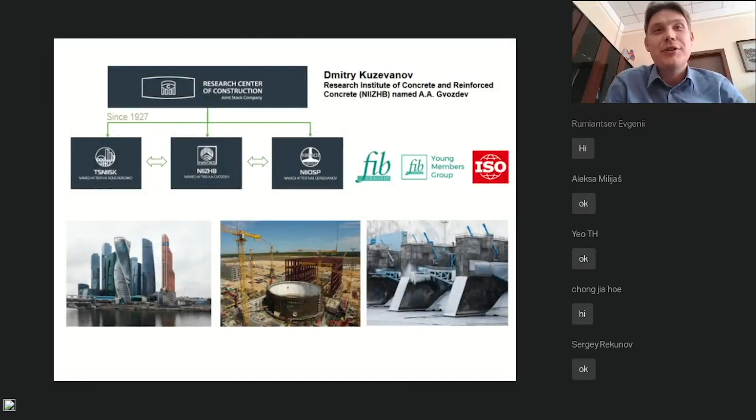First of all, my name is Dmitry Kuzevanov, and I'm the head of one of the divisions of Russian Research Center of Construction, which today is the host and organizer of this online meeting. The division I'm leading is also well known in Russia and in the world as Russian Research Concrete Institute, NIIZHB, with a long history.

It's a great honor and responsibility for me, but there is an important part in my CV that I'm also very proud of, and that is my membership in the International Federation for Structural Concrete, FIB.

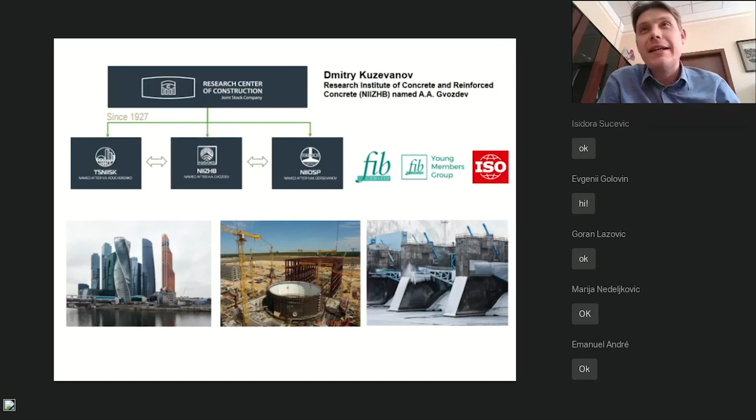FIB is an association, a community of leading scientists and engineers from around the world, and one of the very important projects of this organization is the organization of a special commission for young engineers.

It's called the FIB Young Members Group. The word young is rather flexible, and at the moment we have an age limit of about 40, as far as I remember. This commission, or international group, was created in FIB in 2017, and it was like a bridge between the new and experienced generation.

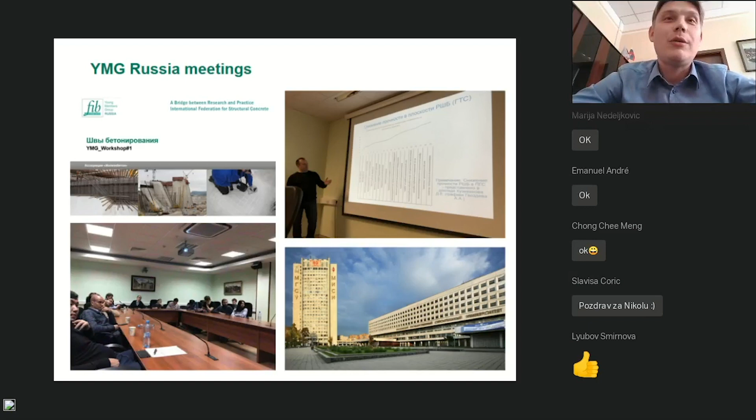We tried different formats and discussed fiber reinforced concrete, FRP, cold joints for concrete, new robotics and digital technologies, and so on. We also discussed research and publications from the FIB Structural Concrete Journal. We tried different formats, yes.

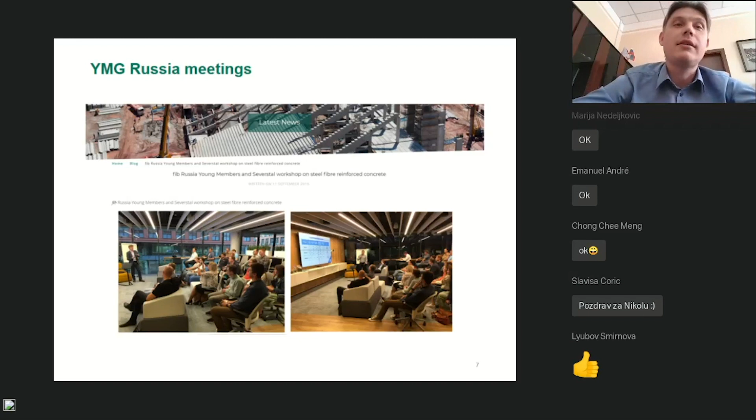We organized a format that was convenient enough for everyone to discuss interesting questions, and we tried different formats, like two-hour sessions after work, like short seminars, and it worked rather well.

While we were discussing this, unfortunately new times came, requiring us to stay at home, and most likely no events will be held until September. Such new circumstances. But fortunately, new technologies and ways for communication have come.

Today we want to test this new format of our work, an online workshop. The truth is what we came up with as a local event for two groups, the Russian and Serbian group, rather quickly became an international one.

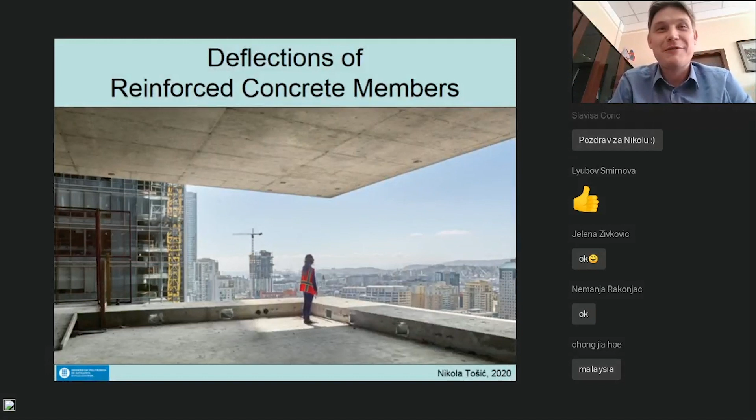Hi, Dmitry. I'm great, thank you, and it's really an honor and a pleasure to be here. First of all, I hope you're hearing me well. Am I okay? Yeah, okay.

It's really amazing looking at your slides and looking back at the times since we first met and started this joint work through the FIB. It's been quite a journey, and it's great that even under these circumstances we come together even more. Very happy to do this as the first of many events. As you said, this is us trying some things, so I ask the audience for patience and understanding for anything we miss, but I hope we'll try to make it as interesting as possible. Thank you again to you and David and your group.

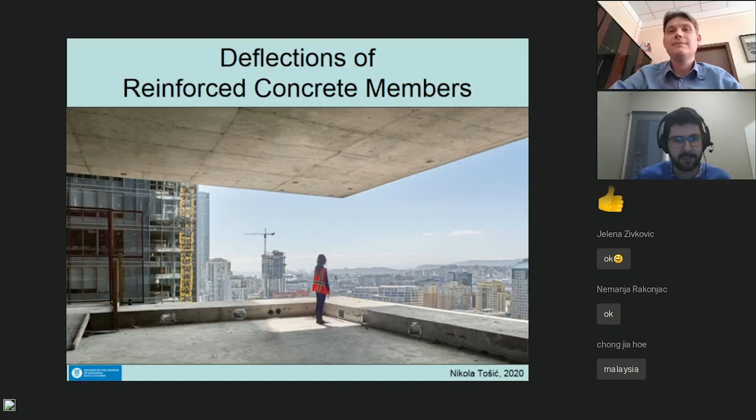We were talking about making the event interesting for everyone, interesting for me to present, for people to hear. And we chose the topic of deflections of reinforced concrete members, as a topic that maybe we shy away from sometimes in design, or a lot of things are maybe not clear. So this would be a kind of overview, but more importantly, I want to present worked examples, some numerical examples and calculations, so that we can go a bit into the nitty-gritty and clarify some things live as we go.

Okay, we're going to have just a brief introduction. There's going to be a general overview of the problem of deflections, of deflection control, and of modeling. Then some theoretical background, then different methods that we have and that are being developed. Then one example calculated using several models, and then we'll comment on the performance of the models and what seems most time efficient to you. And we'll talk about challenges ahead, because this is a topic that has a lot of still unanswered questions, and things in some areas are still difficult to overcome.

So the introduction will be very brief. I want to introduce myself just in one slide. I'm currently a Marie Curie Individual Fellow at the Polytechnic University of Catalonia in Barcelona, Spain. I'm working with Professor Albert de la Fuente in the research group on sustainability and fiber-reinforced concretes. We go some time back through the FIB, it's a connection that was started through the FIB. Just this year I started working here, and this project is going to be focused on fiber-reinforced concretes, but also includes some time-dependent behavior of these concretes, and among those, of course, deflections. Before that, I was for a couple of months a Fulbright visiting scholar at the University of Notre Dame in Indiana, and there I developed and worked on some material models for time-dependent behavior in OpenSees, an open source software, and I'm going to present an example of that today. And before that, I got my PhD and worked at the University of Belgrade's Faculty of Civil Engineering.

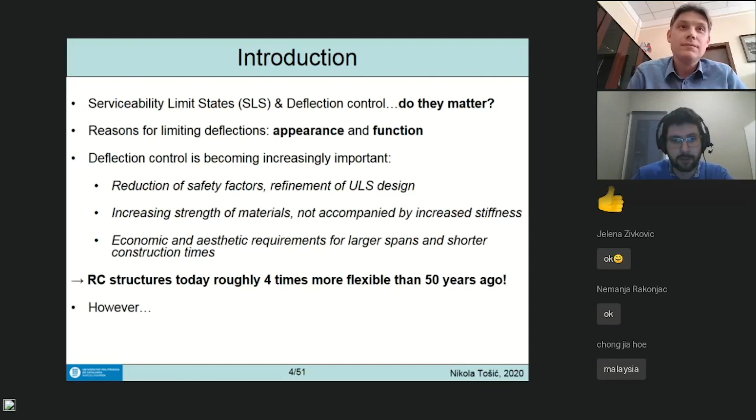However, even though all of this is true, deflections of reinforced concrete members are influenced by many parameters. Really, a lot of parameters are influencing, and they are listed here.

They are the geometric properties of the member, the shape and size of the cross-section, which of course is going to influence the stiffness or modulus of elasticity of concrete, but reinforcement as well. Then the concrete tensile strength, because this is also going to be determining cracking or not.

Then, in concrete structures, we have a redistribution after cracking. Then the amount and placement of reinforcement - whether we have compressive reinforcement or not, how much tensile reinforcement we do. Do we only adopt as minimally required for ultimate limit states, or more?

Load history and stress level in the material. So stages of construction are going to be increasingly important, especially for those early loading times of structures.

Clearly, the statical system and shape of the bending moment diagram, because this is what causes the curvature that causes deflections. Shrinkage and creep, again, which change a lot depending on ambient conditions, concrete, and also a lot depending on what you produce your concrete with.

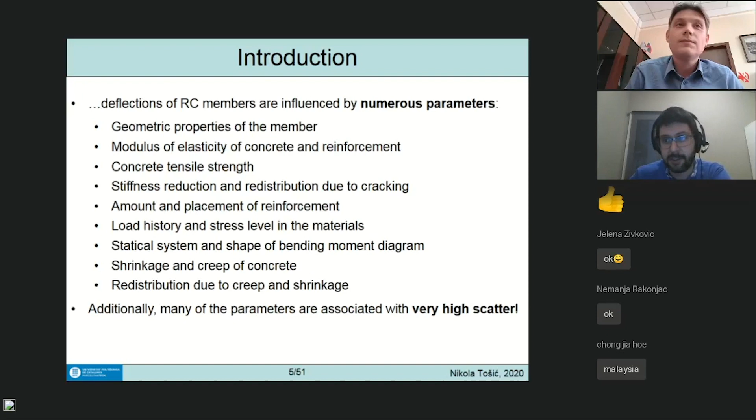This is sometimes not something that we can easily encompass with codes. We have to give something that is an average for a large database, but the variability of this is very large. And then another redistribution of influences due to creep and shrinkage themselves. As there are many parameters, each of them is associated with a very high scatter. So this is all that is making modeling of deflections, of serviceability, of in-service behavior very complex.

Okay, so with that, we can move into a kind of theoretical background and methods that we have. So we said that we limit deflections for appearance and function. So how are these generally derived, and are they precisely derived?

From the current Eurocode, we have the following clause that says that appropriate limiting values of deflections, taking into account the nature of the structure, of the finishes, partitions, and fixings, and upon the function of the structure, should be established. So it is straight away relegated to the client and designer to agree, because it's such a wide topic that, depending on your case, you will probably want some different deflection limits.

But generally, when we're talking about appearance, what we want is to avoid a sense of discomfort, visually and physically, in a sagging slab. So based on studies, which are also from nearly 60 years ago, mostly in Germany, this limit was derived that says that the sag is limited to span divided by 250 for quasi-permanent loads.

These are loads that can be considered to be permanently on the structure, and they include, of course, all the dead loads and a part of the live load, which can be turned to be as if it was always there - which is again some kind of statistical modeling of the load, but this is how it's taken through the code. And then there is this relative to supports, and this bit can also be ambiguous.

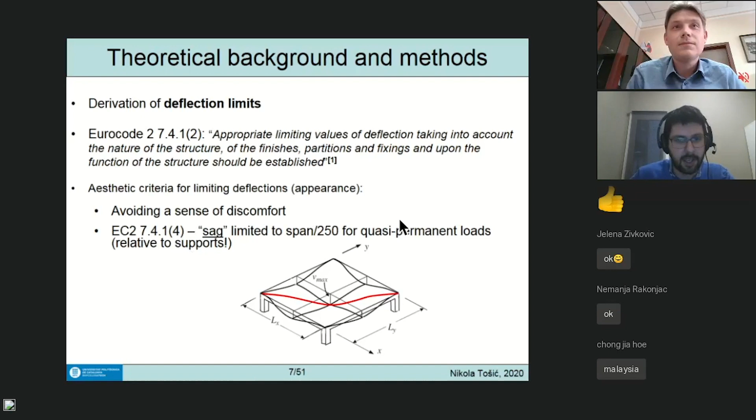The other, as I said, is impairment of function, which can literally mean functioning of equipment. This is an airplane hangar in Belgrade at the Nikola Tesla airport, built in the 90s. Its system is interesting because it's a two-belt system, with a tension chord from pre-stressing tendons and a compression chord. What function means is if this would have a large deflection, the straight line necessary for the sliding door would become this deflected red line, and you would lose function of your hangar.

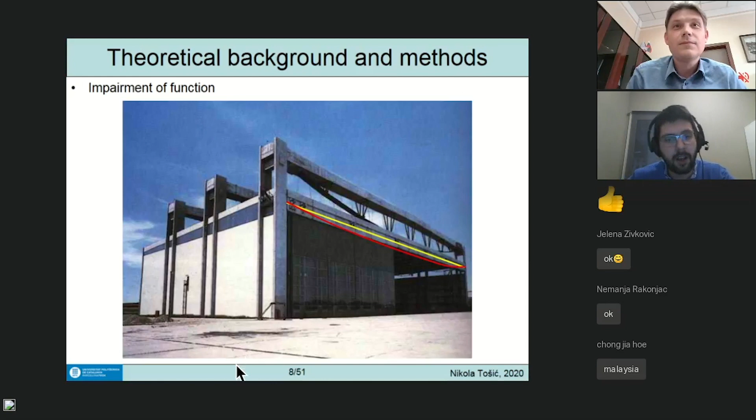You would not be able to open the door. This is one point, maybe less common when talking about buildings. The more common part is damage to non-structural elements. We can discuss whether masonry infill is a structural part or not, but generally deflections can cause damage to them.

Here we are talking about something called deflection after construction, because the partition wall is not built at the same time as your concrete structure, only later. So only part of the deflection is something that affects your partition. Starting from the installation of the partition wall onwards is what you consider deflection after construction, and this has to be limited to span over 500.

This is again a recommendation in Eurocode, so you have to calculate basically two deflections at least: one, the long-term deflection, and then subtract everything that happens until you install the partition wall, and then this increment has to be smaller than span over 500.

You can see here explained the mechanisms by which this damage occurs. If this slab, which is holding up the wall, deflects, part of the weight above is going to be transferred through this arch, but this part here is going to be pulled down with the slab, and the connection is going to break, causing cracking, also from the inclination between the strut and this part here.

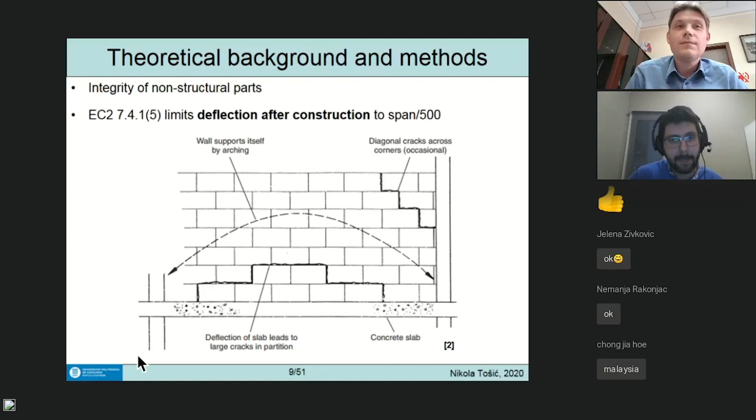So just to formalize, the types of deflections we have are what we call initial, or sometimes instantaneous, or immediate. This is something you can discuss looking into experiments, at least how people define it. It can mean a deflection that is 1 second after applying the load, or 5 minutes, 1 hour, 1 day after applying a load. So it carries a certain uncertainty, but at least a comforting thing for buildings is that we're not so concerned with limiting this initial deflection.

We are interested in the long-term deflection. It's this total, or final, or long-term deflection that has this instantaneous component, and then the increment, which is long-term or time-dependent, added due to creep and shrinkage. Combining these two, you can separate deflections after attachment or installation of non-structural elements. This is what we talked about, which would be the total deflection at some time, minus whatever occurred until we installed this non-structural part.

Considering loads, at least for buildings, we're going to be dealing with mostly two combinations of loads. They're all serviceability combinations, so safety factors are going to be one.

It's going to be the mean value for the dead loads, or an upper characteristic value for the live loads. And we have the quasi-permanent combination, which again has all of the dead loads, but also a fraction of the live load, usually 0.3. So we consider 30% of our live load as if it's dead load. Live load is a variable thing, but when you average it over the 50-year life of the structure, it's as if 30% of it is always there.

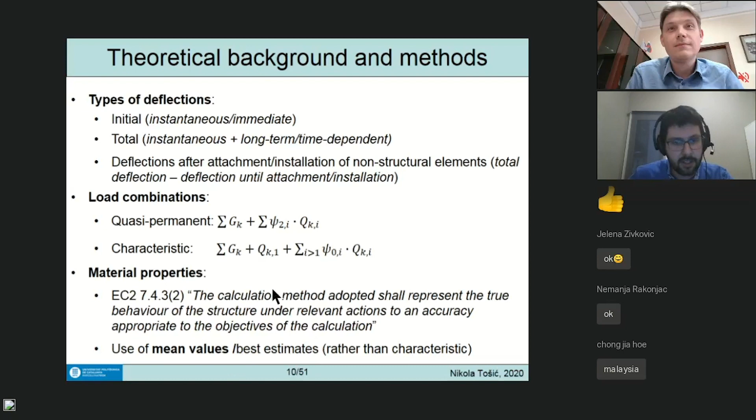Next, we have to know how we're going to model our concrete behavior, and for that we need to know at least closely what is the realistic concrete behavior. Concrete behavior is initially, when you start increasing the load, going to be linear, and it's going to have a stiffness, a response to load - here is deformation - that corresponds to the uncracked stiffness of the structure. So it's the full concrete, the uncracked concrete section, the gross concrete properties, or if you want, you can also consider a transformed section, taking into effect the stiffness added by reinforcement or tendons, if you have them.

But once you reach the cracking load, one section cracks first, then another, and so on. So you gradually have a discrete reduction of stiffness in certain sections. In those sections themselves, you're going to have a stiffness that is highly reduced - that is the stiffness of the fully cracked section. And if the entire beam was fully cracked, composed only of the compressed concrete and the tensile reinforcement, you will have this kind of response.

But of course, you're never going to have a fully cracked section, because you're always going to have something in between the cracks. You always reach that state of developed crack pattern where you cannot open new cracks. So you always have some concrete in between that does not allow you to reach this response, but something intermediate. You approach it gradually - you start after cracking from the uncracked response and asymptotically go towards the fully cracked response.

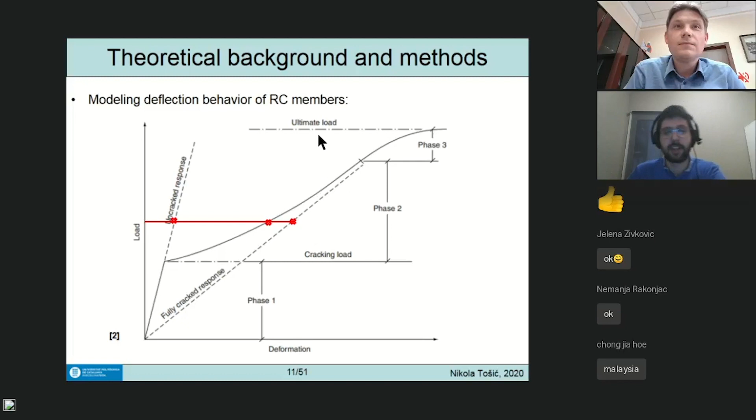In any case, this means that our true behavior is somewhere between these two responses, and we have to find a way to figure out where we are between them for each load. So we actually have to model this behavior between these two lines, and that's what all of the models attempt to do.

What this translates to is this kind of thing. On this figure, a simply supported beam under uniformly distributed load, what happens at T0, once the beam is loaded and a certain zone of it is cracked, is indicated here, meaning the bending moment diagram supersedes the cracking moment here and here.

The curvature of an uncracked section, which double integrated gives the deflection, is this line here, a small curvature. But in the cracked zone, going back to the previous slide, the response of the fully cracked section has this larger curvature. In reality, the real mean curvature in the cracked zone is this dashed line here.

What happens over time is that the effects of creep and shrinkage further increase this curvature. Why? Because they increase the strain in concrete. So looking at the cross section here, you start from a concrete strain, epsilon c at T0, with this neutral axis here, and this cross section strain line.

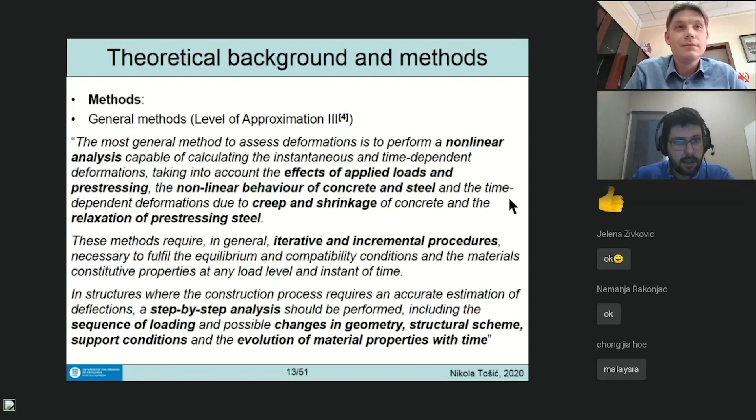What this actually means is that for this we need nonlinear finite element analysis. This can be commercial software like the ones that we all know, ATENA, Diana, Abaqus, all of these, name it, whichever has material property capabilities. But also, at least for researchers, open source software. Here I'm mentioning OpenSees because that's the framework within which I developed a model, and I'm going to show it later.

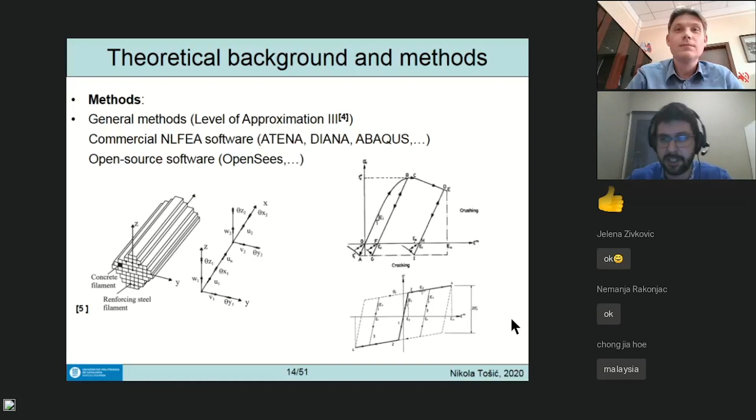This here is from the FIB Bulletin 92, and this is the CONS software developed by Professor Toni Marí here in Barcelona at UPC. It is a general method, so you need capabilities that discretize your cross sections into layers or filaments. You need to be able to assign complete degrees of freedom to the elements and the nodes, nonlinear behavior of concrete, nonlinear behavior of steel, and so on, and then conduct this iterative procedure that solves for everything.

Further, also within the general methods, we have something that is not based on nonlinear finite elements, but is a kind of, let's say, for me, level of approximation 3B. So it's a notch below these. It's the famous Zeta method of integration of curvatures. It's called the Zeta method based on that distribution or interpolation coefficient that actually does the modeling of where we are between states 1 and 2.

And it's a general method, it has general applicability, but some things are more difficult in it than others. What this does is discretization of the concrete into discrete lengths that are assumed uncracked and fully cracked. Basically in reality, between two cracks, you have some tension stiffening, which is the contribution of concrete between the cracks to tension, because not everything is fully cracked. But we cannot do it precisely for each point.

So what we say is, on average, we're somewhere in between. How do we get to this average? By saying that some parts are assumed fully cracked and the remaining part is assumed uncracked. And then when we average these together, we are somewhere in the middle or closer to one or the other. So this is the distribution coefficient Zeta, which is between 0 and 1. When it is 0, then we are at the uncracked stage. When it's 1, we are at the fully cracked stage. So it's as if we said that these parts are Zeta times S half, which are fully cracked, and this left in between is assumed uncracked, for the crack spacing.

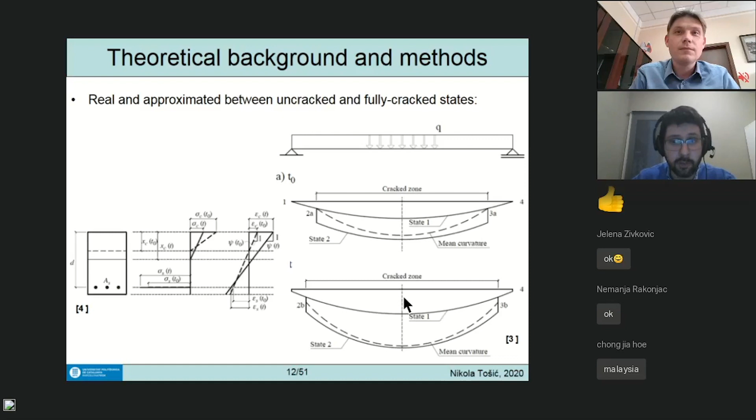Actually, images, if I just go back. Here, the fact that we had increasing curvatures, and see, the distance from state 2 here is bigger than here. So over time, we're going to move closer to state 2, and this is going to be represented by the decrease of the beta empirical factor from 1 to 0.5.

Now, this 1 is actually also first loading, when you're sure that your structure is not cracked for the first load. So all in all, a recommendation could be to just always use 0.5 and be on the safe side, but theoretically, yes, it is formulated as 1 or 0.5.

The stresses, this sigma SR is later going to be replaced by the cracking moment, but here it is the tensile stress in reinforcement calculated for a cracked section. So this is important: you calculate it for a cracked section under cracking load.

Okay, so basically at the cracking load, you have a response infinitesimally before, which is with the uncracked stiffness, or you have it afterwards. That's the jumping curvature that you usually see on moment curvature relationships. So this you calculate with the cracked section stiffness and precisely under the cracking load.

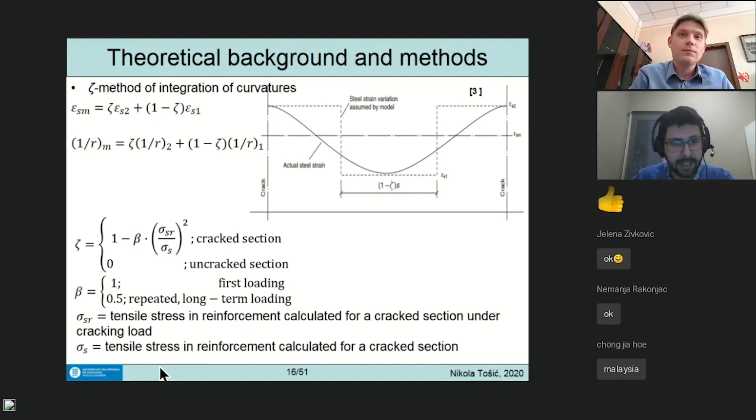And this is going to be your tensile stress for your load, basically. But we'll see also later, it's going to be for the maximum load that you can have in a structure. Okay, sorry.

So continuing later, how do we take other things into account in this Zeta method? Creep. There are more complex ways of taking this into account, like Volterra integrals and so on, but they can only be solved for a limited number of cases.

The most common way is through the effective modulus of elasticity, which is the modulus of elasticity divided by 1 plus the creep coefficient. We're going to talk about the choices of creep coefficient, but basically this is the formulation. What you can do for buildings, for example, when doing more simplified analysis and not wanting to model stages of load application, is use an effective creep coefficient.

So you have your self-weight applied at 40 days, your additional dead load at 60 days, and maybe your live load at 180 or 360. But to apply it all at once, you would say, okay, it's as if I was loading everything at 28 days.

But all of the load I am modeling with this effective creep coefficient, which is now each load times its own creep coefficient that depends on the time of loading of that particular load, divided by the total load. So it's a kind of centroid of the creep coefficient, and then it's a single creep coefficient. It's going to be useful for simplified models, but of course not for the general method where you want stages of load application.

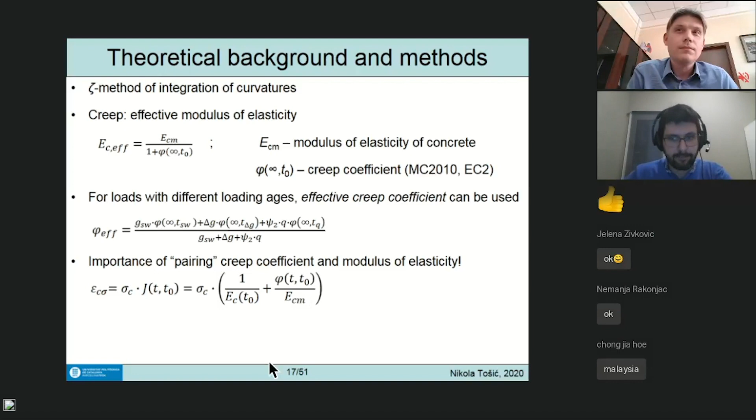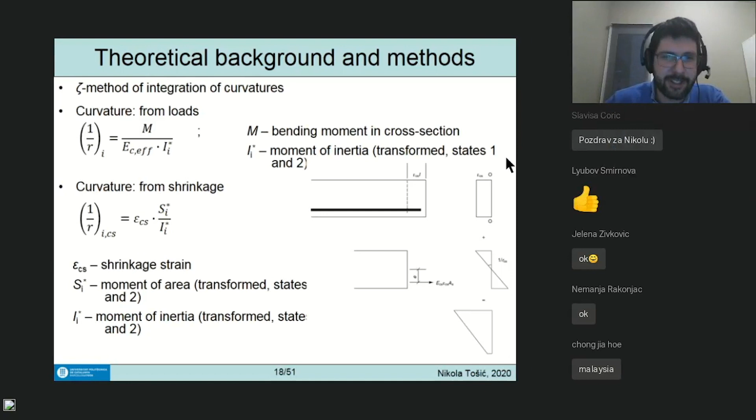I'm a bit worried, honestly, that I don't see any questions so far. I hope at least someone will be the icebreaker. I don't know, Dmitry, do we have any questions? No? No? Okay, okay, going forward.

We covered creep, now shrinkage. So, from creep we get the curvature from loads, which is basically just the moment divided by bending stiffness, but here we have this effective modulus, so M over EI. This moment of inertia ideally should be the transformed moment of inertia for states 1 and 2, meaning taking into account reinforcement through the ratio of moduli of reinforcement and concrete.

Curvature from shrinkage is explained here for sections without compressive reinforcement. The concrete would want to shrink, but the reinforcement would not, so it gets compressed while concrete gets tension. The resisting force causes an additional curvature. Of course, if there was the same amount of reinforcement in a symmetrically reinforced cross-section, there would be no curvature from shrinkage, but this is not how we reinforce slabs or elements in bending.

We reinforce them according to the bending moment diagram, so in 90% of cases there is a difference between the tension and compression reinforcement. Hence there is a curvature due to shrinkage, which is like this, where this is the free shrinkage strain, again calculated according to the model code 2010 model. This is the moment of area of steel, again in states 1 and 2.

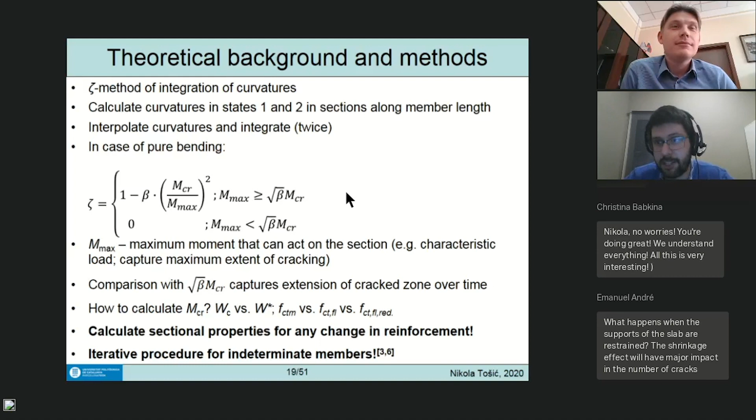So calculate the curvatures in states 1 and 2 and in sections along member length. This is the general application, so it is based on a section, and you need to divide your length into a number of sections.

Emmanuel asks, what happens when the supports of the slabs are restrained? The shrinkage effect will have a major impact on the number of cracks. Yes, and this is something that your general method should again be able to take into account. You will have to impose, as we'll see later when doing the integration, boundary conditions on your model.

Calculate curvatures in states 1 and 2 along the member length, interpolate and integrate them twice: once to get inclinations, and a second time to get deflections. In case of pure bending, and since I'm focusing on buildings, it's going to be pure bending, you can reformulate your Zeta distribution coefficient not in terms of stresses, but moments.

So sigma SR becomes M cracking, and M maximum is the maximum moment acting on the section. Let's clear up first what M max, the maximum moment that can act on the section, actually means.

Imagine you are calculating deflections for quasi-permanent load, and in your cross section the moment from quasi-permanent load is, say, 10 kilonewton meters. That's not what's going to go into Zeta. It's not going to be 10 here as M max. You're going to want to plug in your characteristic bending moment for that section, which will be, let's say, 12.

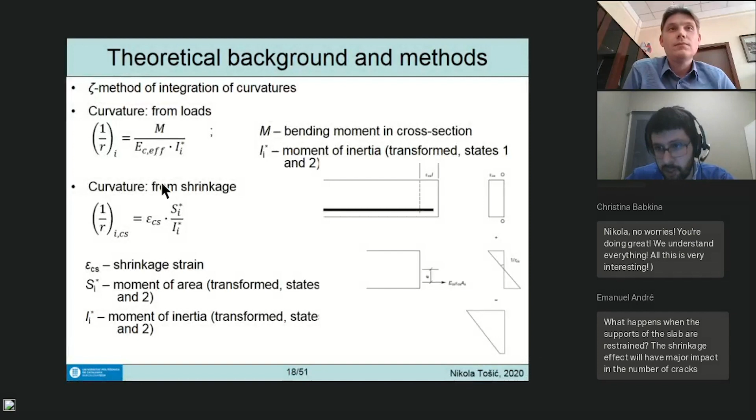Which is not necessarily the moment under which you're calculating the deflection. So what you used to calculate the curvature here is generally not going to be the same moment that you're going to plug in here. It's probably going to be the characteristic moment, the one that has one characteristic load in full and the others in combination.

Now, it is zero when this maximum moment is less than the square root of beta times MCR. So it seems as if we're not comparing with the cracking moment, but with the product of this. Why? Because if you just put this beta within the brackets here, it becomes square root of beta, since here you're squaring. That's the fact that this beta is modeling the reduction of the cracking moment.

Because when beta is 0.5 for the long-term deflection, square root of 0.5 is around 0.71. So that amounts to pretty much saying that over time you lose about a third of your cracking moment due to shrinkage. And for a variety of cross sections, you can calculate this yourself. You can calculate relatively simply how much tension you are producing by shrinkage, and you will see how much you are reducing your flexural tensile strength.

Now this is another question: how to calculate the cracking moment. The simplest way is, of course, to use the gross section modulus, but you can use the transformed one, taking into account the reinforcement. It's not going to be such a huge difference. But the question of choosing the tensile strength is also important. In some ways it's an academic discussion only, but in some ways it could also be important.

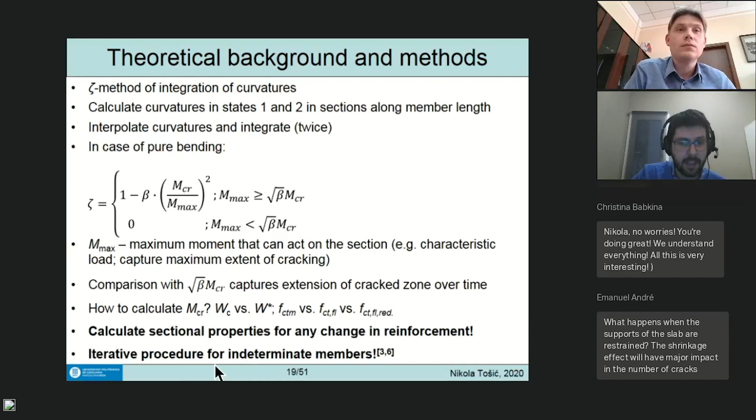Okay, then we come to level of approximation 2, one step below. These should be relatively more simple, kind of simplified Zeta methods. They are still based on interpolation, but this time it's as if we integrated in a single step, not across different spans or sections, but in one step. So we interpolate deflections directly: we calculate deflections from the section properties in states 1 and 2 and interpolate between them. This introduces an error, but there are ways to compensate for that. This is the expression used when interpolating deflections directly.

There are several methods. The most famous one was developed by the group here at UPC, Professor Marí. Before, in Model Code 2010, it was stated generally that it's sufficient to calculate deflections twice and interpolate. Now, I'm guessing in the new one it's going to be more precisely prescribed. You're going to have a real procedure laid out, and I'm going to present that procedure later, their procedure for calculating the deflections.

What they do, because in the general Zeta method you need to calculate sectional properties for any change in reinforcement, is recognize this and introduce effective reinforcement ratios. So there are these combinations: you have rho C, the reinforcement ratio in the tensile part, this is the part LC. You have this section with some reinforcement, compressed and tensile, and here also. You have expressions that give you an effective tensile reinforcement and an effective compression reinforcement. This is what you use to calculate your sectional properties, because now you calculate only for a single, equivalent effective section.

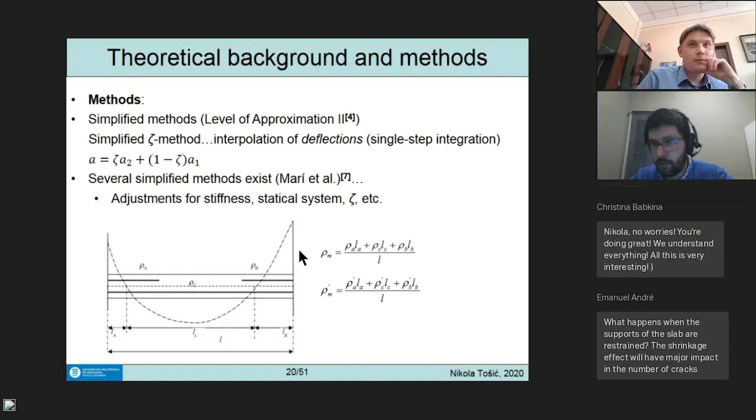So this is important, and then, of course, there are ways to introduce creep, shrinkage, and so on, which we're going to see in the example. Okay, there is level of approximation 1. I'm not presenting it here, but there is a newly proposed method, only for long-term deflections, a much more simplified method that will allow you to calculate long-term deflections. It's probably going to be the new Eurocode, new model code, new method. But there are also these indirect deflection controls, cases when you don't need to calculate deflections at all.

And these are basically what you know as limiting span to effective depth ratios, L over D. They were derived based on large parametric studies. Of course, with any kind of formulation like this, it's going to be difficult to capture all parameters in a simple formulation.

And yeah, there have been some challenges with using that. Probably the formulations are being changed, because it highly depends on the choice of your parametric study. For example, if I recall well, in the one done for the current Eurocode, a creep coefficient of 2 was assumed, a shrinkage strain of 0.4, and a ratio of quasi-permanent to design load of 0.5, but in buildings it usually comes out as 0.62. And then this means a bigger impact on the L/D ratios, so there were changes necessary there.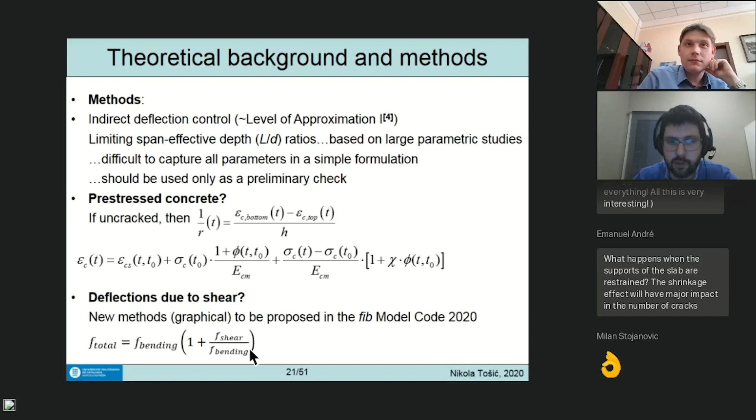Deflections due to shear - this is put as a question. There are situations when this can be important, and there are newer methods, kind of graphical simplified approaches to go through a normalization. So you go through your bending deflection, and then you would get your shear deflection from some graphs. With this expression, you would be able to add the influence of your shear deflections to your bending deflections. Again, it's going to be for sections with a thin web, prestressed sections, concentrated force - not a large number of situations where this is important.

But of course, keeping in mind that here I selected a simply supported beam, so there won't be any effects of redistribution, and it's closer to modeling a beam than a slab. For slabs, you would have some things appear differently, but I wanted to go through the numbers exactly, not just show graph results - I wanted to go into the model itself and the calculation.

So it's a simply supported beam, a program from the University of New South Wales, Professor Gilbert, who is really a famous name in this field. In the program, they had beams and slabs - 6 beams, 6 slabs. I chose the first one to not be biased in some sense.

They had a span of 3.5 meters, dead load, self-weight, and 2 additional forces at the thirds of the span. So this means that in this case we only have 1 load - there is no application of a load and then removal, so we don't have a characteristic and quasi-permanent, we only have 1 load that is applied at the same time.

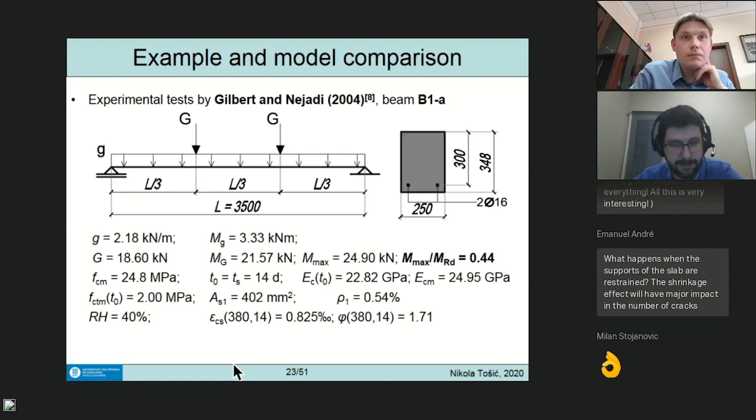Humidity was generally 40%, and these were the final measured shrinkage and creep values, final meaning at 380 days. The shrinkage strain - this is when talking about the uncertainties of creep and shrinkage. Try to model creep and shrinkage with these inputs, with 40% humidity and these strengths, and at the same time get such a high shrinkage strain and such a low creep coefficient. It's a bit a strange combination, but it just goes to show the scatter of the results of these models. You would expect a concrete having such a high shrinkage strain to have a much higher creep strain, but that's just the result. So these are the inputs that we have, and these are the deflections.

So, sorry, Dmitry, how do I remove this? Sorry, okay, never mind. No, because I'm seeing the strip with all the slides, and it's blocking my view of the slides.

Okay, I'm okay, sorry. So these are the deflections that were measured for 380 days, starting from 14 until 394. So it was under load for 380 days, and it went from about 5 millimeters to 12.06. So a 2.4 times increase of the deflection over time.

For a beam, it's as expected, and depending on the loading ratio, the lower your load, the closer you are to the uncracked section, the bigger this increase is going to be. Because in a cracked section, what's going to creep is the compressed part, which is going to be increasingly smaller as you go to higher loads, and its effect is going to be smaller and smaller.

So here we have from 5 to 12. For a lower load ratio, it would be more. In any case, here I'm repeating just the main data of the beam, and you see this I'm showing in a linear time scale. There's this whole discussion to be had about showing time-dependent, especially logarithmic behavior, in a logarithmic scale and so on, but I think for all of us it's going to be clearer looking at it like this. So you see this kind of nice, logarithmic development of the deflections.

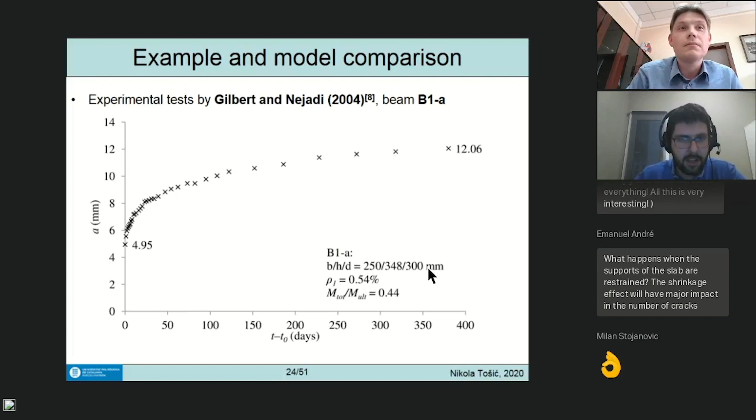Okay, first comes the general method, the nonlinear finite element analysis. And here I'm talking about OpenSees, which probably a lot of you have heard about through earthquake engineering, dynamic engineering - an object-oriented open source structural analysis software developed at UC Berkeley in California.

And it's really a versatile software. It's hosted online, you can download it for free, of course use it for academic purposes, but you can add new code to it - your models, your elements, your analysis procedures, everything. So this is what I worked on at Notre Dame last year.

Professor Yahya Kurama, with a former PhD student, developed first some time-dependent concrete models back in 2012, 2013, based on ACI. So the models had the ACI creep and shrinkage built into them. Later I updated them, added new models that had the model code 2010 creep and shrinkage formulations, and even had a fully nonlinear behavior. So before it was with some tension softening behaviors but linear in compression; we added a fully nonlinear response for concrete, plus the model code creep and shrinkage models.

So we managed to get even the code incorporated into the source code of OpenSees. So now if you go from this website to GitHub and download the code, if you compile it in your Visual Studio or whatever you're using, you will get these models with their functionality. Within them, we have this TD concrete - time-dependent concrete - MC10, standing for model code 2010, NL, nonlinear material model. So with the nonlinear concrete behavior, given here with parameters, inputs that can modify this curve completely in compression and in tension, and give you creep and shrinkage according to model code 2010.

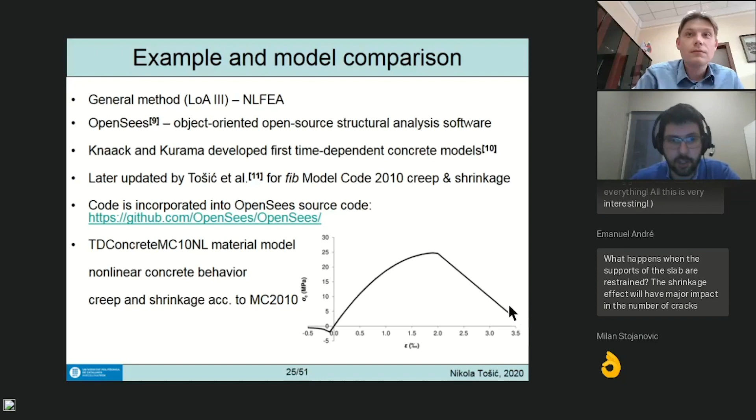Generally, the procedure, I'm not going to spend too much time on it. It does what it needs to do. It discretizes a section into fibers. It has an iterative solution procedure, using pseudo time steps like in static analysis, only now you switch a global variable on so it starts accumulating creep and shrinkage strain. This is the solution procedure, but I don't think we need to spend time on it. It's generally what you would have for these softwares.

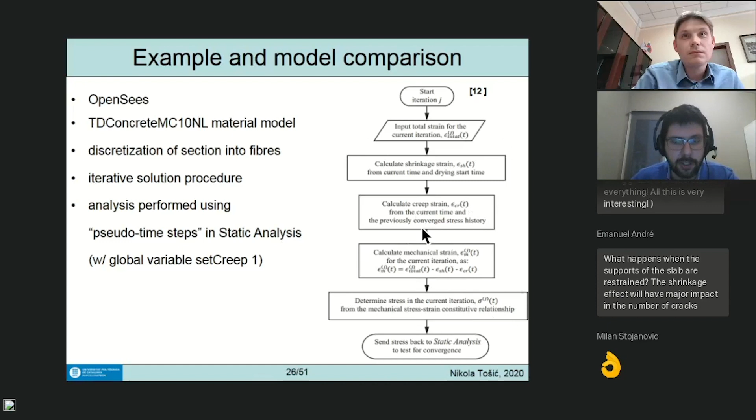It's not so user-friendly because it's open source. You have some pre and post processors, but you can use MATLAB. Generally you code in TCL. This is the language you use for OpenSees to model. Here is the part where you discretize the section, generate elements, and get the output, which is again in this very ugly format. But as I said, you can use MATLAB and plot very nice graphs and everything you need. You just need an exe file. Even if you don't compile the code, send me an email and I'll send you the exe file and you can use it.

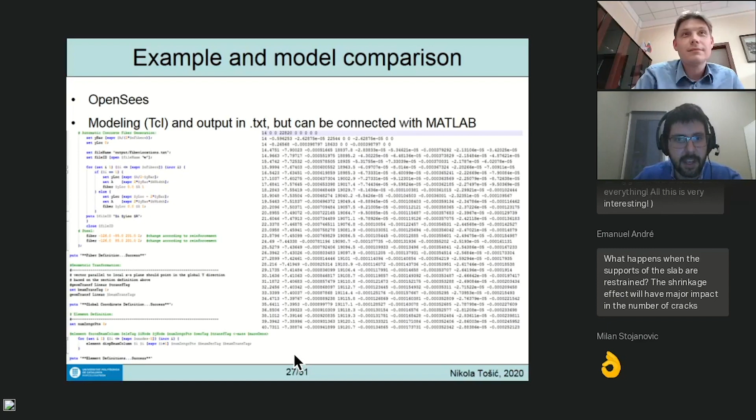When we apply this model with all of the inputs, there's no reason for me to show you the input files if you're not using OpenSees, but this is the result we get. It's using everything measured. The inputs are the measured compressive strength, measured tensile strength, modulus, creep, and shrinkage. Everything is from the experiments, because we really want to test the model. We don't want to introduce new uncertainties by predicting things from compressive strength.

We see that it's perfectly capable of capturing the evolution of deflections, getting the curve right, even the initial and final deflections.

Alex says you can try the STKO preprocessor, it's good enough. Okay, thank you, we'll do that.

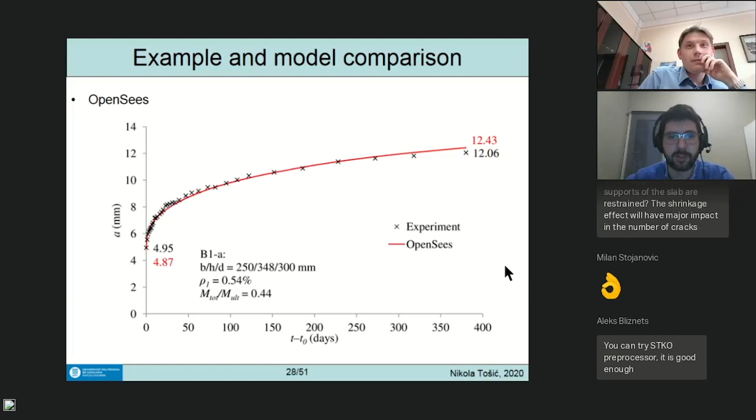So STKO is a pre and post processor for OpenSees. And you can, as I did, use MATLAB.

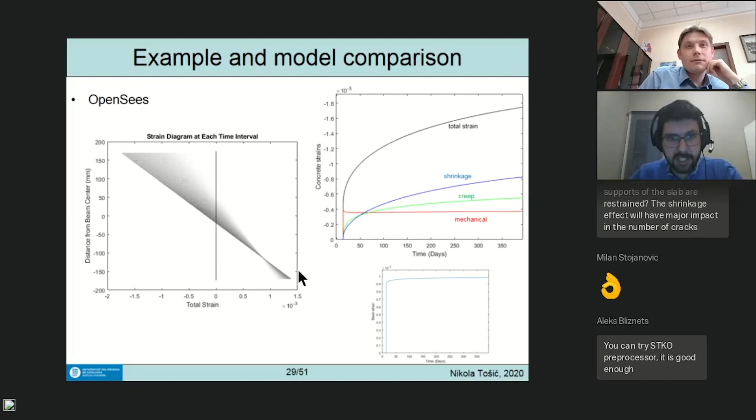So this is what the model offers you. It's okay, but this software particularly is academic, and you really need to be using it, and it takes some time. It takes debugging. You're for sure going to have problems, and not everything is going to work from the first time. Absolutely, it takes some time.

Also to note, this is now applicable to beam models, and we're going to get later to slabs, but it's for beam elements, and basically it's not something we're so interested in. Of course, you can model a grillage, but that's even more time.

Okay, let's see what the zeta method of integration of curvatures has to offer. Here I'm presenting a calculation example for the final deflections at 394 days, and I've separated into 10 sections. I'm going to integrate over 10 sections, and later I'll show you with more.

As I said, I need to calculate a lot of things. I need my cracking moment, which is here, the gross section modulus and mean axial strength. It's 10 kilonewton meters. My maximum moment is almost 25, so it's pretty higher, it's for sure cracked. Effective modulus here, okay? And now this is the thing that I was talking about.

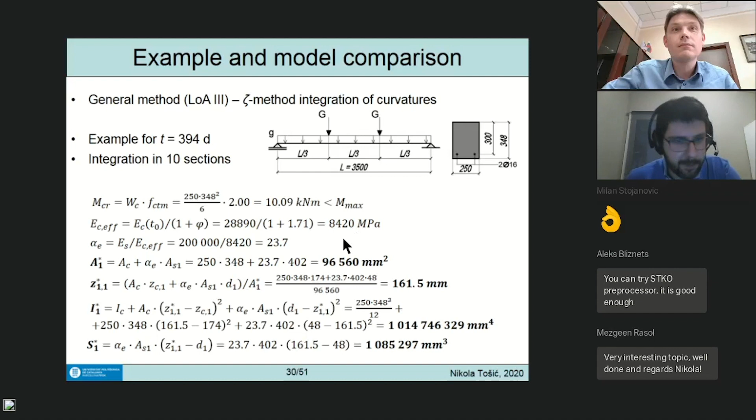I'm going to use the measured creep coefficient, which is just the creep strain divided by the initial strain, and use it with the modulus at the time of loading. So I'm not going to separate into modulus at 28 days and modulus at loading, since I'm not calculating the creep coefficient separately. We see that the effective modulus is about 2.7 times smaller, and the modulus ratio is now 23.7 - the steel modulus over the concrete effective modulus.

Now I have to calculate certain geometric quantities. I need the transformed area of the section in the uncracked state, so all of the concrete is active. I have the area of concrete, and the modulus ratio multiplying the reinforcement area, because each square millimeter of reinforcement is worth 23.7 square millimeters of concrete. So I get this area.

I need the centroid of the section, calculated from the bottom. It's just the concrete with its centroid, plus the reinforcement with its centroid, the reinforcement always multiplied by the ratio of the moduli, divided by the transformed area. I get 161.5. The concrete section alone is at 174. So the centroid of the concrete section is at 174 millimeters, but the reinforcement at the bottom pulls the centroid down, giving us 161.5.

The moment of inertia is, of course, the moment of inertia of the concrete section plus the parallel axis component - area times the difference in centroids squared - and the same for the reinforcement area. This gives the moment of inertia and the moment of area of reinforcement. Again I introduce the modulus ratio times the area and the difference between the centroid of the transformed section and the centroid of reinforcement. I get these values - the numbers aren't so important, it's about 1 billion and 1 million something.

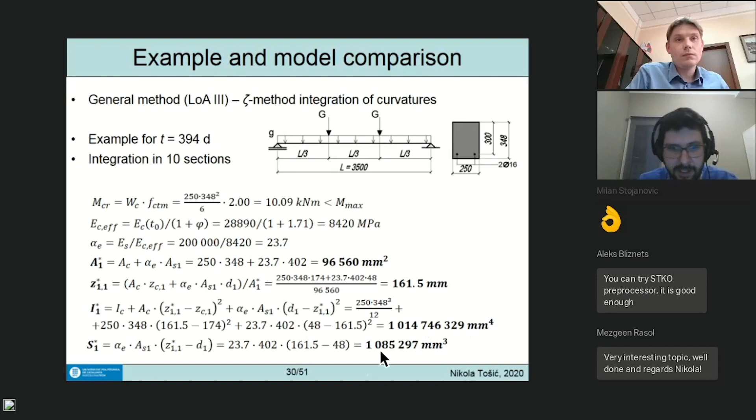I have that in state 1, but I need it in state 2 as well. The lucky thing here is that I don't have any curtailment of reinforcement, so I only need to do this once - the reinforcement is constant along the beam length. If I had, for example, 3 bars and curtailed the middle bar at some point along the length, I would have to do all of this also for the parts with only 2 bars. But being a simple example, I don't have to do that.

I am going to calculate the neutral axis position in the cracked state. In the cracked state I'm assuming linear behavior, so the neutral axis position doesn't depend on the loading - it's constant, so I just need to calculate it once. If I had an axial force, that would not be the case. This is just a ready-made expression with the reinforcement ratio as a variable, and the modulus ratio, giving 0.393.

So it's 117.9 millimeters, and the new area, which only has the area of compressed concrete, is much smaller - from 96,000 down to 39,000. The centroid of this section is now 230 millimeters, because I only have concrete at the top and reinforcement here. The moment of inertia is about 2.4 times less, from 1 billion down to 450 million - close to the effective modulus ratio, 1 plus 1.7.

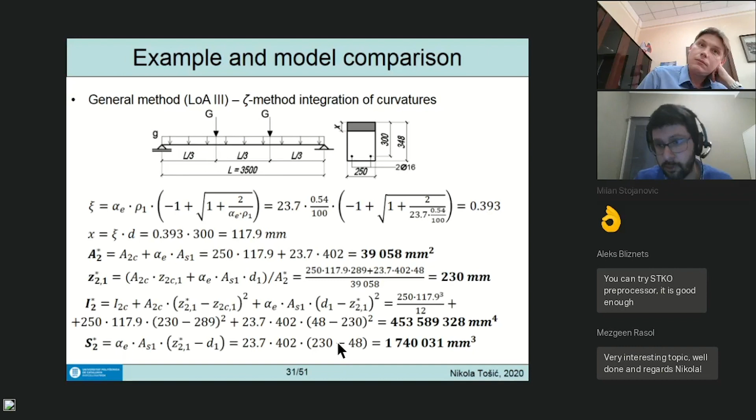So I have this, and now I'm going to do an integration and show you how you can do it in Excel in 10 sections, but it can be in 50, 100, or whatever, using MATLAB or anything else you need. I divide the span into 10 sections in increments of 0.1, so x over L. I need the moments in each section - in this case I have a parabola for the self-weight.

And I have this trilinear function for the additional dead load - these are the equations for the self-weight, just a general parabola, and this is for the dead load: linearly increasing until the third of the span, constant, then decreasing for the last third. I put in the final values, and in the middle it's 24.9.

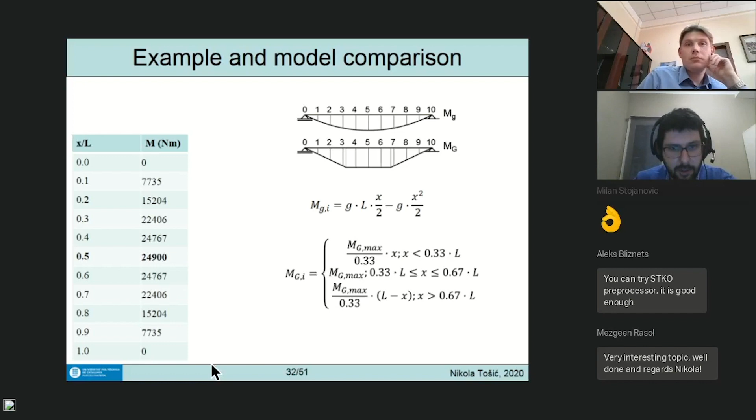Okay, so going forward, next what we calculate are curvatures in state 1, from load and from shrinkage. Okay, how do we do that?

Of course, curvature from load is M over E times I, and from shrinkage it's epsilon times S over I. That's why shrinkage is constant. The curvature is constant because the distribution of reinforcement is constant.

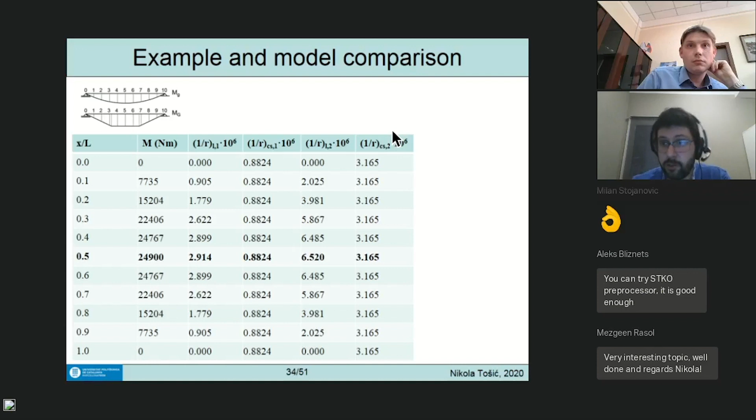Okay, so it's a constant curvature, and this follows the evolution of the bending moment. I do that for state 2 as well, so I see how much the curvature is larger for both. And again, for shrinkage, it's constant because of the constant distribution of reinforcement. Importantly, it's positive—it's in the same direction as from bending.

Then I interpolate the curvatures using the zeta distribution coefficient. Here, M max is going to be this M. If I had a higher load that was applied and removed, that would be the moment I would introduce here, but it's not, so I have these moments going here. For beta, I used 0.5 because I'm calculating the final deflection.

And I'm making this comparison. So it's 0 basically only here, and already here I'm cracking. So I have very small parts of the section that are uncracked over time.

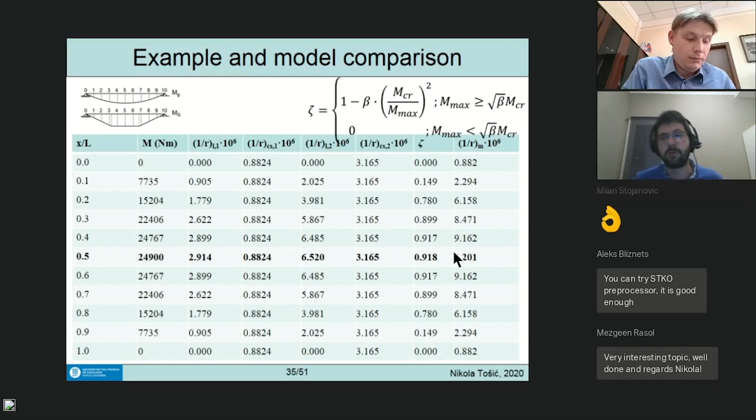And I have the mean curvature. Of course, this mean curvature is the load plus shrinkage in state 1, interpolated with the load plus shrinkage in state 2. So in state 2, we see that it's 9.7, and the interpolated is 9.2. So I'm pretty close to the state 2 curvature. Okay, then I do integration.

First time to get rotation. This is the expression that I use, and you see that it just keeps increasing. It's because I'm still not applying boundary conditions—that's why I call it uncorrected rotation. But this is just the expression that I use, and I keep integrating until the end.

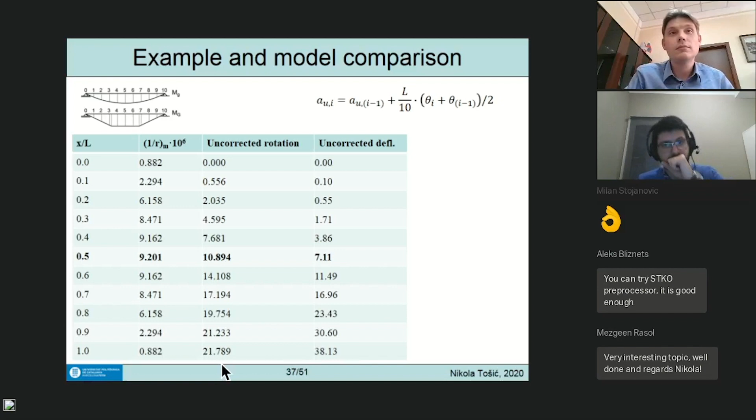After that, I do another integration to get uncorrected deflections. Again, this doesn't look good because the deflection is highest at the support. So I need to introduce a correction for the deflection, and it just means getting it to 0 at the end. So the correction is just going to be x over L times the last deflection.

Okay, so the correction here is going to be equal to this, so it's going to get it down to 0. And then when I apply the correction minus the uncorrected deflection, I get this. Now it's symmetrical, and I have the maximum deflection in the middle, 11.96 millimeters, for integrating in 10 cross sections along the length, which is pretty good.

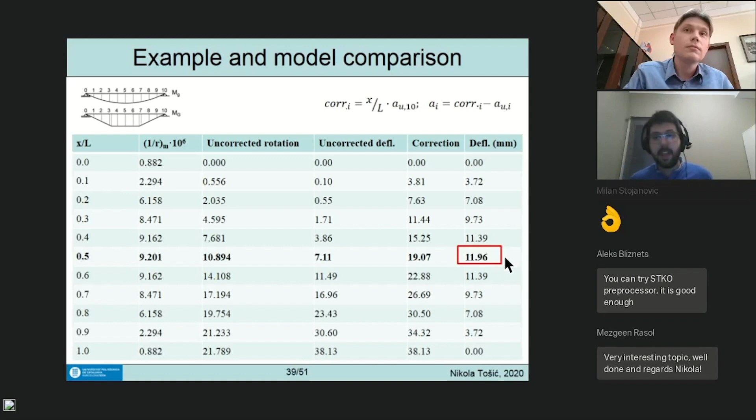And that's it for that. If I do it in 50 sections, like I did here, and I do it for every time step, I get a bit higher—12.18. So I have an increase of like 2-3%. So going from 10 to 50 sections, it's not going to bring you more than 5%, at least in this case. And these are the results—they're again pretty good, though there's a kind of different evolution here.

What I maybe didn't say is that for the OpenSees model, it also considers creep in tension, taking it equal to the creep in compression. Now, this is something that even in experimental results is maybe not so clear—it's maybe even bigger, the creep in tension—but it's something that the model takes equal to the creep in compression. Basically, the agreement is good, it's there.

The result is very good considering the experiment. Again, taking into account that if it were a statically indeterminate structure, if I had any changes in reinforcement, all of this calculation would have to be 2, 3, 10-fold more.

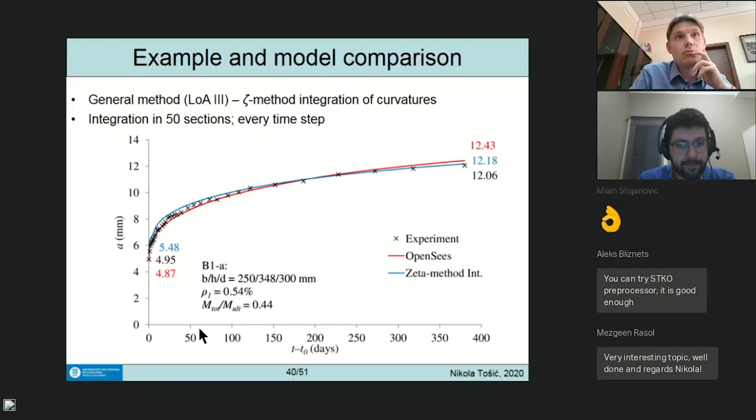And let's apply a simplified method—I'm going to do the one formulated by Marí and others. So what this method does is calculate and interpolate initial deflections. So the interpolation is just done for the initial deflection. Then you multiply that initial deflection by a factor to get the increment due to creep, and you add the shrinkage deflection. So the basis is a bit different, but I'll walk you through the process. And of course, as I said, you use average reinforcement ratios.

Again, this example doesn't have compressive reinforcement, no changes in reinforcement, so I don't apply this, but otherwise you would.

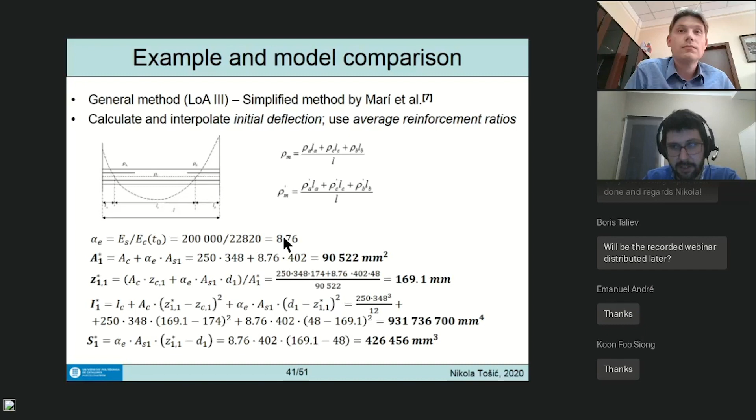So you need to, because you're doing the initial deflection, take the ratio of moduli at this time, T0, which is now 8.76, not 23.7. And you're calculating the area of reinforcement. Now it's different because this modulus ratio is smaller, so it's not 96,000, it's 90,000, and all the values are a bit smaller because the ratio of moduli is smaller. But you're doing it in state 1 and state 2.

Again, the neutral axis is going to be different because this modulus ratio is different. At time T0, the neutral axis coefficient was 0.263. At time T, which was 394 days, it was 0.393. So that's the shift in the neutral axis over time.

This is the area of compressed concrete, and here are the geometric properties we need. I'm not going to explain them again, you will have them on the slides. Again, the numbers are going to be smaller because of the smaller modulus ratio, smaller area of compressed concrete, and so on.

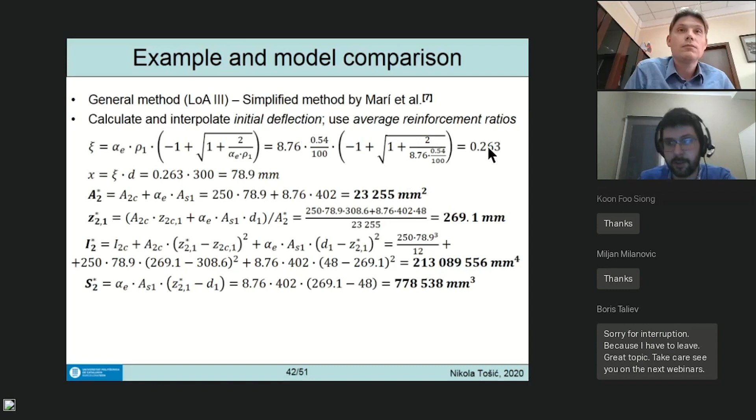So what you do is calculate deflections now in states 1 and 2. From load, you calculate deflection as K, which is a factor depending on the statical system and loading, times ML squared over the stiffness, using the modulus at T0. K is 0.104 for uniformly distributed load, multiplying the moment from self-weight, and 0.107 for two-force loading at the thirds, for 4-point bending, multiplying that moment, times L squared over the stiffness. It's 1.53 millimeters in state 1 and 6.68 in state 2.

Now here, the zeta coefficient has a slightly modified formulation with an adjustment coefficient K0. K0 has this formulation, an empirical one. The point is it takes into account the uncracked parts of the beam. When you're interpolating deflection, you calculate it in two states and interpolate, but you have to use a single zeta for all the interpolation. When doing it in sections, every section has its own zeta. So which zeta do you use when it's a single value? You have to somehow adjust it for the fact that there are uncracked parts. You don't just use the maximum value or medium - you use this K0.

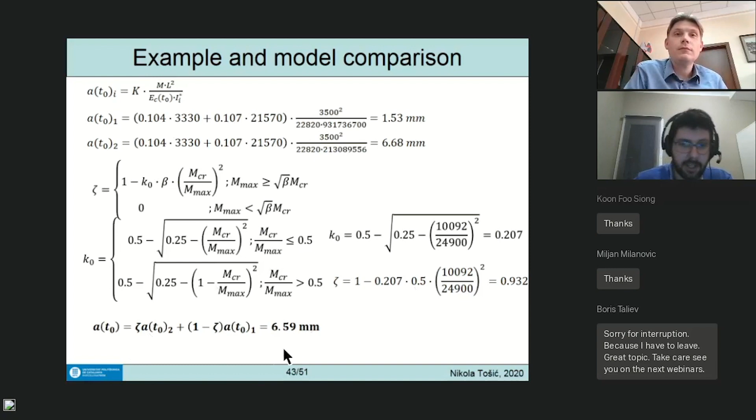Using that initial deflection, we calculate the effect of creep. For uncracked members, it would just be the initial deflection times the creep coefficient, but we have a cracked member, so it's the initial deflection times the neutral axis position, x over d - in this case, this xi coefficient. It's 0.8 times KT, which depends on the reinforcement ratio - that average value, 0.3 plus 100 times rho - times the creep coefficient, over 1 plus 12 times alpha, the modulus ratio, times rho prime, the compressed reinforcement coefficient, again the effective value, which we don't have, so it's 0. What we get is 2.17 millimeters, the effect from creep.

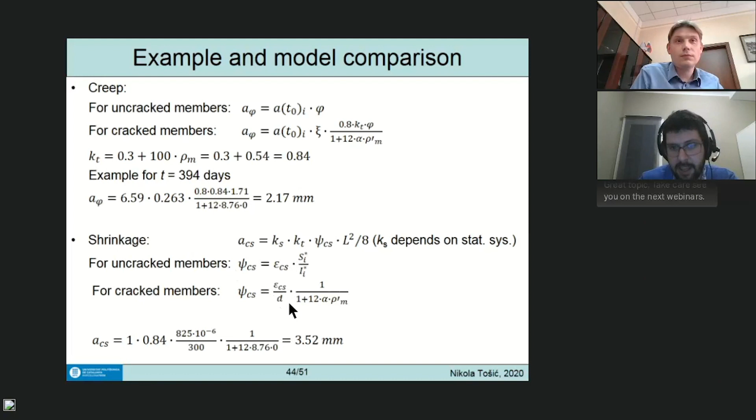From shrinkage, it's a separate value since it's independent of load. It's Ks, a coefficient depending on the statical system - 1 for simply supported beams, 0.7 for edge spans of continuous beams or slabs, and 0.85 for interior spans. Then KT is the same coefficient as before. Psi CS is the curvature from shrinkage - if uncracked, it's like this; if cracked, it's the shrinkage strain over effective depth, times 1 over 1 plus 12 alpha rho m. When you multiply everything - Ks, KT, strain over depth, and this part - we get 3.52 millimeters.

Evgenii is asking: on the diagram you show, we can see that shrinkage does maximum effect to total strain, more than even creep. Does it follow that shrinkage is the most important factor for deflections, or am I not understanding the diagram?

It will depend on your reinforcement. As I said, the strain has a high impact, and particularly in this case because the value was 0.83 per mille with a very small corresponding creep coefficient, which was a bit strange. If you calculated it properly, you'd get a much higher creep coefficient and the values would be more comparable. But the effect of shrinkage on curvature doesn't follow directly from the strain alone; it also follows from the distribution of reinforcement. So just by adding a little compressive reinforcement, you'll reduce this curvature because you change the moment of area of reinforcement, since here we only have tension reinforcement.

In this case, yes, the effect of shrinkage is very high, and here you see it too: 3.52 versus 2.17 from creep. But this is just in this particular case, it's not a generalization. Of course for slabs and buildings, you know that curing and shrinkage, because of the cracking that shrinkage can cause, is going to be a very important factor that I agree can sometimes be overlooked in its importance.

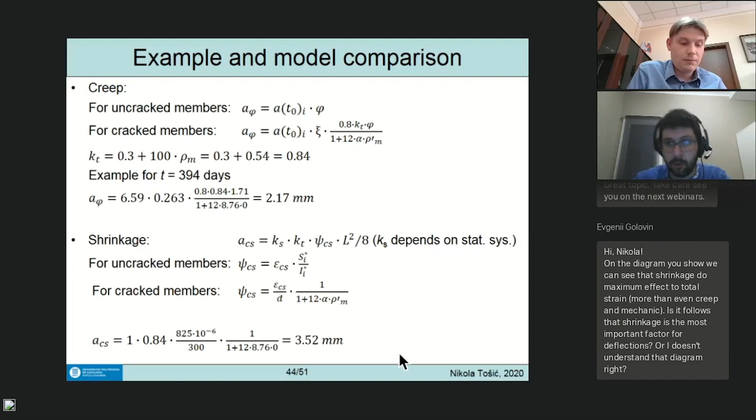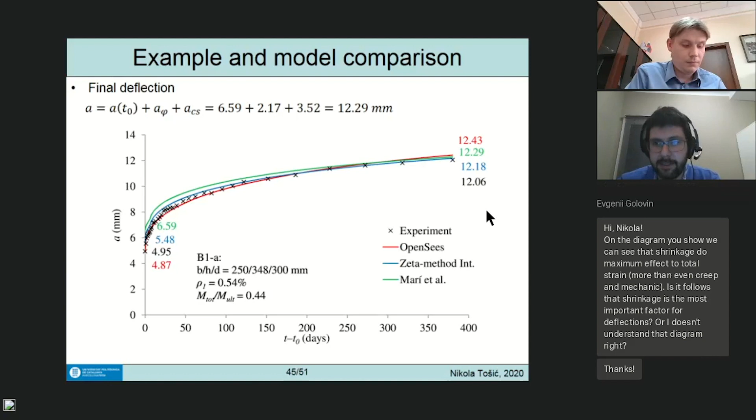Okay, and this is the final value, 12.29 millimeters. We are somewhere in between the Zeta and OpenSees methods, a bit safer than the Zeta method, which is what you want from a simplified method. But the computational cost is much smaller. So these would be the three methods that we saw.

Now, which model would you pick? That's for you to think about, for which applications, and most importantly, why? And another question to consider is, what about input parameter uncertainties? In design, you would just have your concrete class and calculate tensile strength, modulus, creep coefficient, shrinkage strain. But in reality these can easily be plus or minus 30%.

As I told you, for creep and shrinkage, take these values and calculate them by model code. You will never get at the same time a high shrinkage and low creep coefficient, okay? So in reality they can differ. And what are the effects? Here I did a small

But they are huge for slabs, for example, which as I said usually have a service load close to the cracking load. Imagine that when you're calculating your predicted tensile strength, it shows that the slab will be uncracked with a very small deflection. In reality you don't cure the slab well, there's lower humidity, and you get a lower tensile strength and lower cracking moment. It cracks and the deflection jumps because now you're interpolating between a cracked and non-cracked slab, and the difference is huge for a small difference in the parameter value.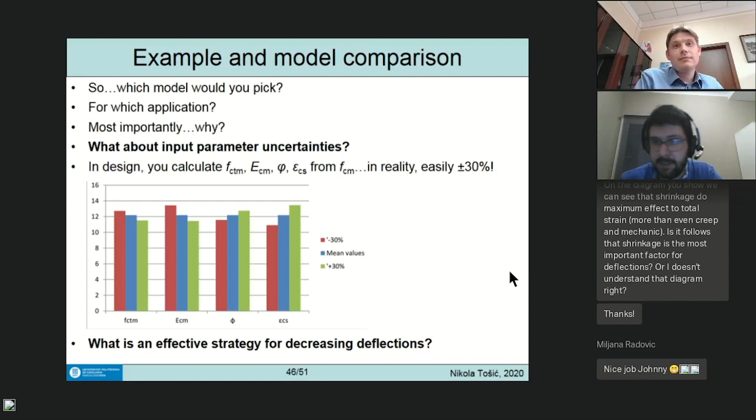Then think about an effective strategy for decreasing deflections. Is it increasing concrete strength? Probably not going to make such a difference, as I said, the modulus isn't going to change much. Are you going to add tensile reinforcement? Is that going to help? Or are you also going to add compressive reinforcement? If shrinkage is the problem like here, adding an equal amount of compressive reinforcement will eliminate the curvature from shrinkage completely. So how much does that cost? Is it effective? How are you going to distribute that reinforcement, and so on?

So what about the elephant in the room? I've been talking about slabs, and all of these models look pretty simple for beams, for linear elements. But what about bidirectional elements? How do you calculate deflections for them? That's the million-dollar question so far, and there isn't a straight answer, at least not for now.

What do we do with flat slabs or edge-supported slabs, slabs supported on beams? For 50 years now, the answer has been: approximate them with strips. So for an edge-supported slab, take a strip in one direction and its tributary load, depending on the support conditions, and calculate the deflection of this. This is really a crude approximation.

If these were beams and the slab didn't have continuity, this would be a simply supported beam, but you'd have to calculate how much load falls on this beam. If the spans are equal, that's half the load in each direction, so you say: simply supported beam under half the load, that's it. But of course, we know there's the effect of the other direction - the torsional stiffness of the beams in the other direction is what gives also stiffness to the bending in this direction, which isn't taken into account.

And it's even worse when we get to flat slabs, because there the recommendation is: take a strip in one direction, then take the strip in the other direction, and superimpose the deflections. Take a strip over columns, and in the other direction a strip through the middle, and combine these two deflections. Then do it vice versa - this column strip and this middle strip, and then average these two. It's really crude approximations.

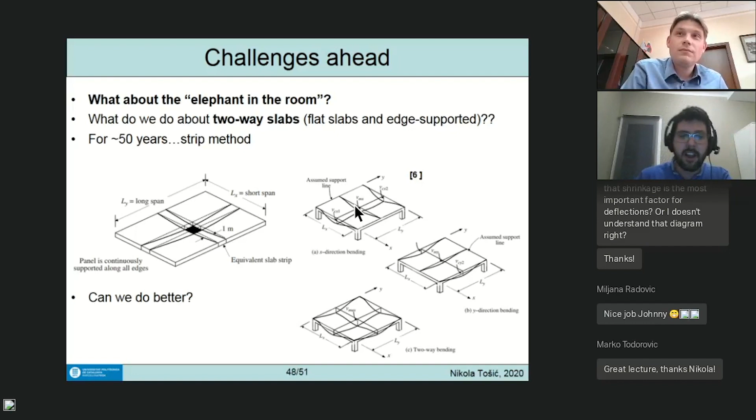The goal is, can we do better? And I think yes. The task group 2.1 is working on it. Even just yesterday, I had a meeting with Professor Toni Marí and Luis Torres here from Spain, and we are testing some methods, some approaches.

What we want to do, what I think would be a very good way, would be to use linear FEM results. Most of you in design will be using a linear FEM software. This will be familiar to a lot of people in the audience - this is from a Serbian program called Tower. So it's shell elements, linear analysis, black box, very simple, but you get some elastic deflections.

How can we use these elastic deflections to somehow transform them into deflections in the cracked, uncracked state and get a prediction of the long-term deflections? We can go into the direction of transforming the FEM deflections based on transforming stiffnesses - this would be the stiffness in the software, and this would be what we calculate for a section here. But this is not taking into account the torsional stiffness. It is taking into account in the software, but not here, so we have to look into that.

And what about shrinkage? How do we add shrinkage, because it's very difficult to model in this software - is it temperature, is it somehow calculated? We're looking into that. And we're missing experiments, there aren't a lot, so we're hoping - this is also an open invitation - if you come across literature of experiments on bidirectional slabs, please send them my way. Or we'll have to go into nonlinear finite element parametric studies and then calibrate the models on those.

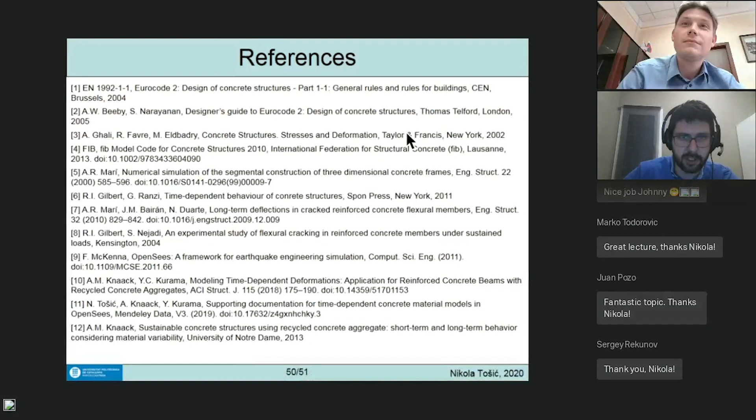That's all. Okay, are these methods applicable for GFRP reinforced members? Can we take into account creep of GFRP reinforcement with these methods? There are separate sections, if you look into bulletin 92 - this is not my area, but there are specific sections on GFRP. So I'm not in the position to directly answer this, but I would direct you to the FIB bulletin 92, because I know it has sections, and probably in the new model code there will also be specific sections for GFRP.

Yeah, so a new question in the chat. Greater strength of concrete, greater width of crack opening - does compressive strength of concrete higher than you need become bad for this?

No, it's not the intention to convey that it's bad. It's just that it's causing us to think more about serviceability, and I think this is a good thing, because then we are developing our methods, since the methods have been in some aspects undeveloped for some time. The tools are now there - finite element modeling is becoming more commonplace and easier to use. So as you see now, we're looking into bidirectional slabs. It's a good development, and we will overcome this challenge, and then we will catch up with ultimate limit states.

Okay, Albert says, yeah, deflections in FRC members. Thank you, Albert - Albert de la Fuente, that I was talking about at the beginning. So yeah, as I said, that is the topic that our research group is looking into.

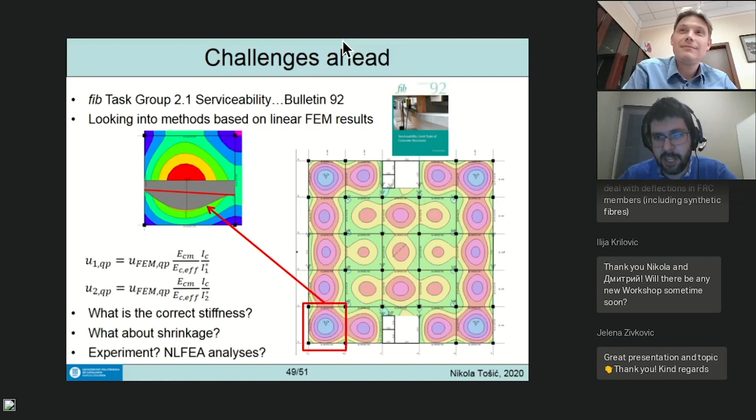Yeah, well, Dmitry will say for the Russian group, for the Serbian group, we are talking and have been thinking of something similar. Our idea for some time has been to actually emulate what the Russian group is doing, which is very interesting for me - the journal club, reading articles from Structural Concrete. So this is somehow first on our list, to make an online presentation of some papers from Structural Concrete.

Hi David, oh David, join us again. So yes, well, I was listening. I just wanted to congratulate Nikola - great presentation, thank you, very interesting. I hope we can share it online somehow, on the YouTube channel or something like this, because it's great.

For sure, and great initiative, Dmitry. Very, very nice. Yes, today we tried it for the first time, and I think that we have succeeded in this. And I heard a lot of interesting information, and I think that the Russian group will analyze it and try to compare it with Russian models. It will be very interesting, and probably we can share our experience soon. But it was the first time, and I think we will schedule new webinars soon. And I think our groups, Serbian groups, and in the international way, we can make such events.

I think it's the only way for the next couple months, or maybe more. I think it's a good event, and it was a good event.